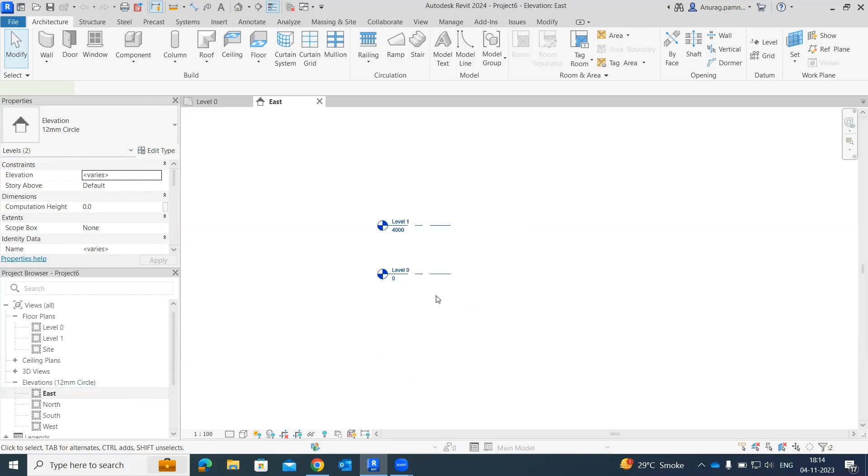And if you move on to our elevation portion, on east, you can see as well there are two different elevation levels. So there are different ways of working with levels. Let's say on the project browser I have a project of 5 floors or 4 floors, so how can we duplicate those levels and maintain and manage them in our project browser?

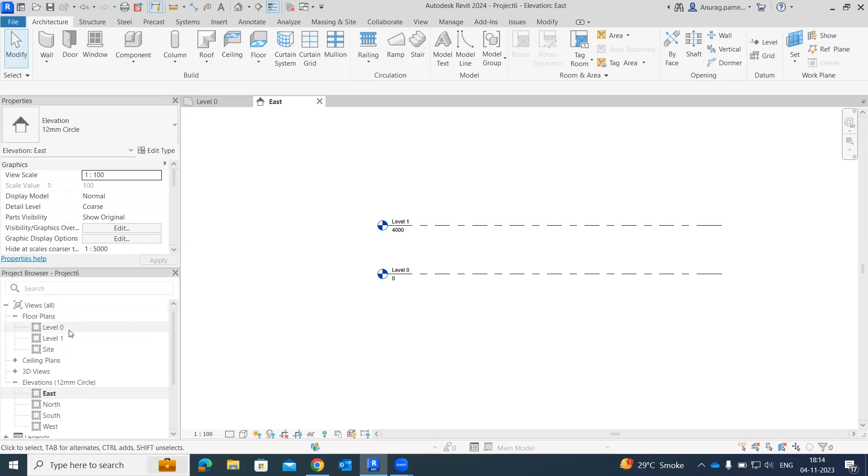So the first part is going to the level, clicking on it, and we can duplicate the view with detailing. You can see a separate copy layer is made and you can rename it. Say I would name this level number 2. So in this way you can work.

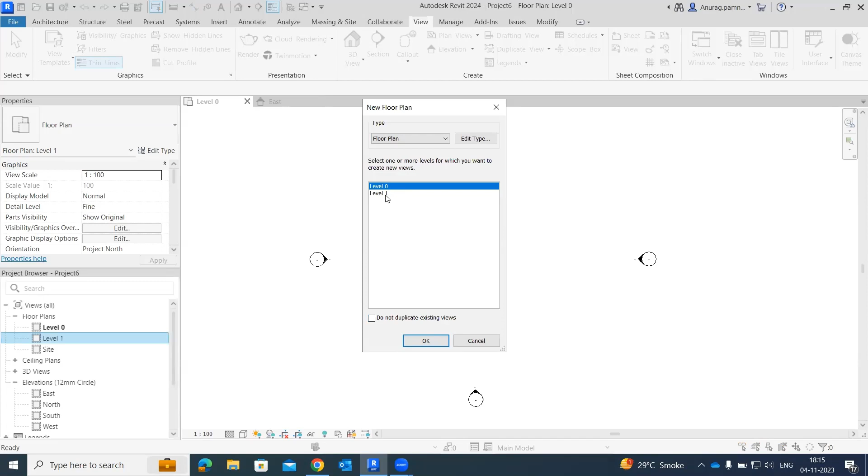One more way of working with it is I would go on it and delete it for an instance. If I need multiple copies of these two levels, I will go to my view, and under the view tab you can see plan views and floor plans. There is an option 'do not duplicate the existing views', but I need a duplication of views, so I'll uncheck it, select the particular levels, and say OK. You can see multiple levels have been created.

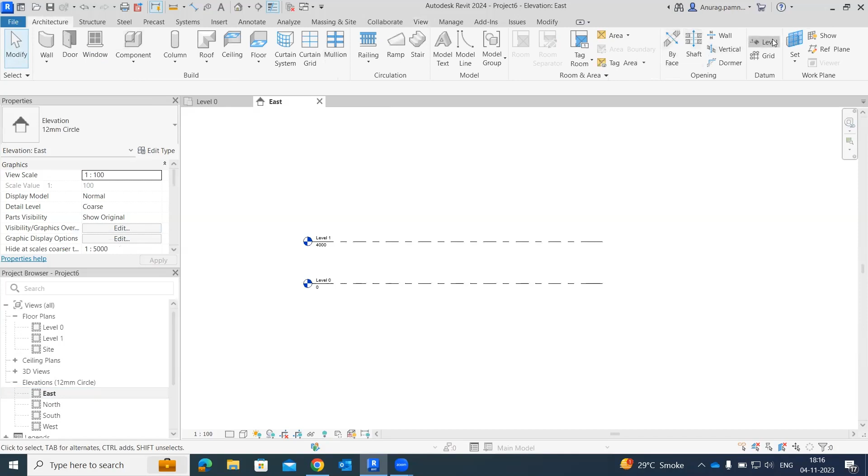Before this, a better way to have levels is I would be deleting this again, delete the copied levels. You can see on the elevation portion I have east and this. I will go to architecture, and under levels, if you start making it, it will take level 2, level 3, level 4, level 5, and so on. You can see a number of levels have already been managed in the project browser as well.

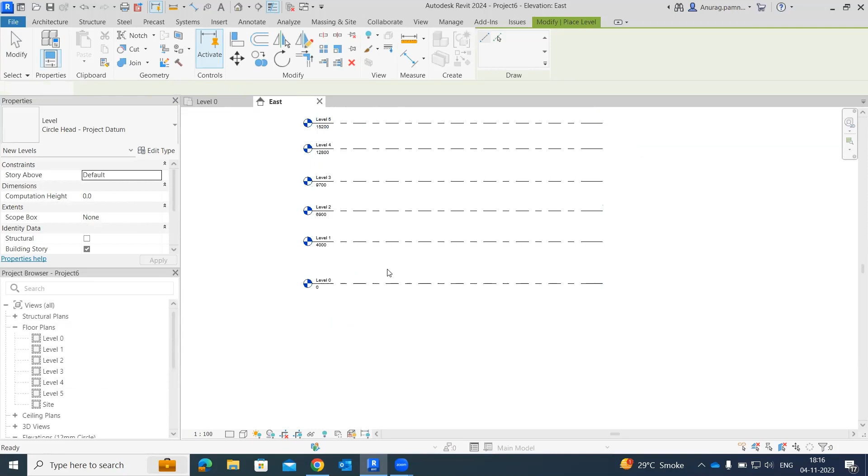So if you manage both of these together, that would be a better approach to work with levels. Just before setting up any project, set its levels and what's going to be its height, and develop the levels accordingly. It would be automatically managed on your project browser at the same time.

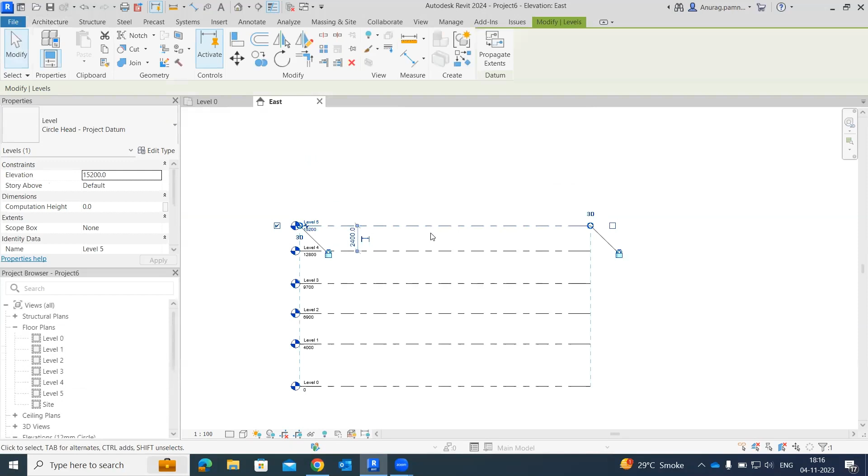Suppose I just copied it, and at the same time I have assigned it. Over here you can see there is level 6, but it doesn't appear on the project floor plans. So what I'm going to do is take it over here.

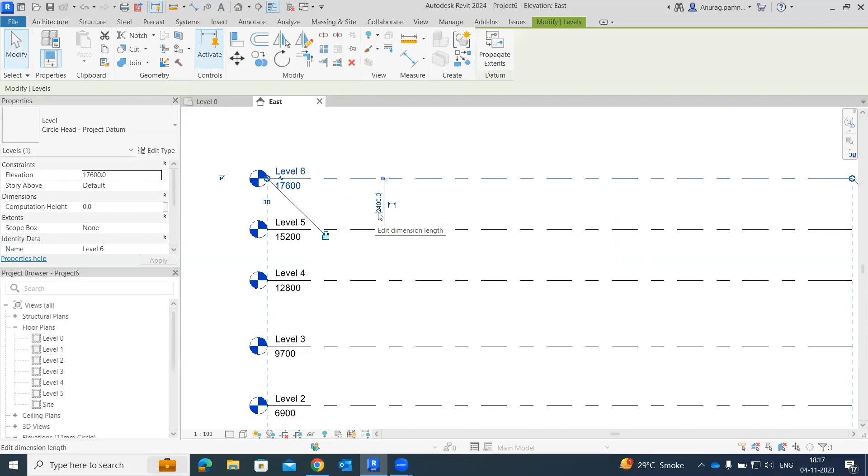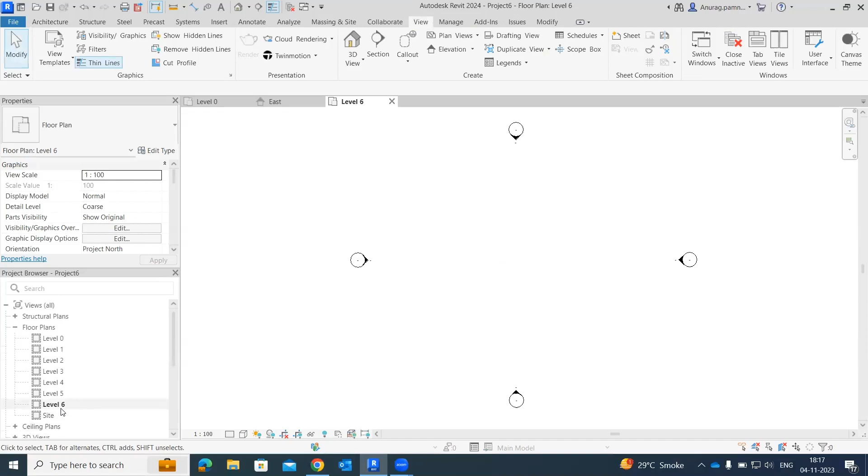If you are copying the same levels with different dimensions, suppose this height would be 3000, so I can set it accordingly. I have to go back to my view, plan views. Under floor plans, you now have this level as 6. Again you can uncheck it and you need to add the 6th level to it, say OK, select it, and OK. Now you can see a 6th floor is also available to us. This is how we work basically.

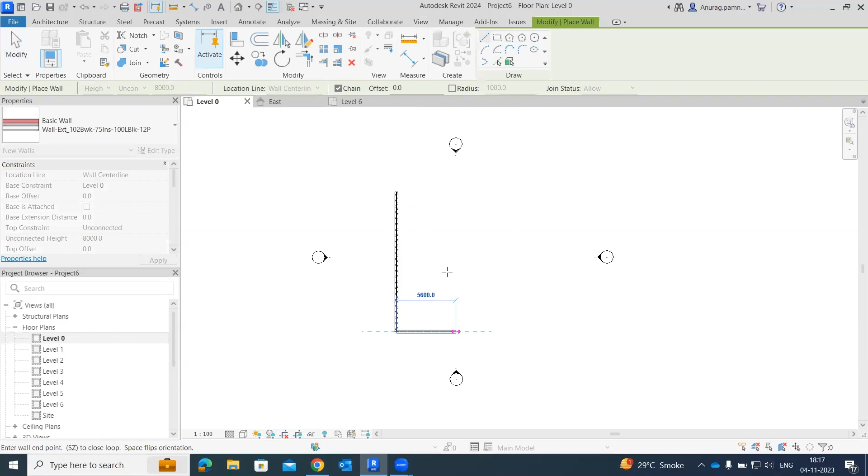Now I would have a single plan over here, and let's see how we can associate it with a particular level. I will use a command known as wall, and randomly I'm drawing a floor plan, which is at level 0.

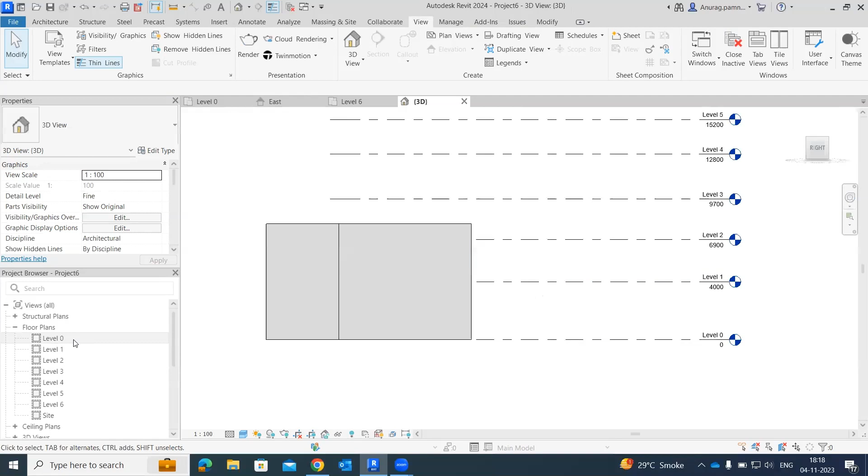So you can see on the 3D part of it, it has been associated with certain different levels. If I just have this, you can see it has a bigger height, which I don't want. I need to associate the base of it as level 0 and the top level of it as level 1. So I would be selecting the entire elements, and under properties you can see its base constraint is level 0 and its top constraint is unconnected, with an unconnected height of 8000.

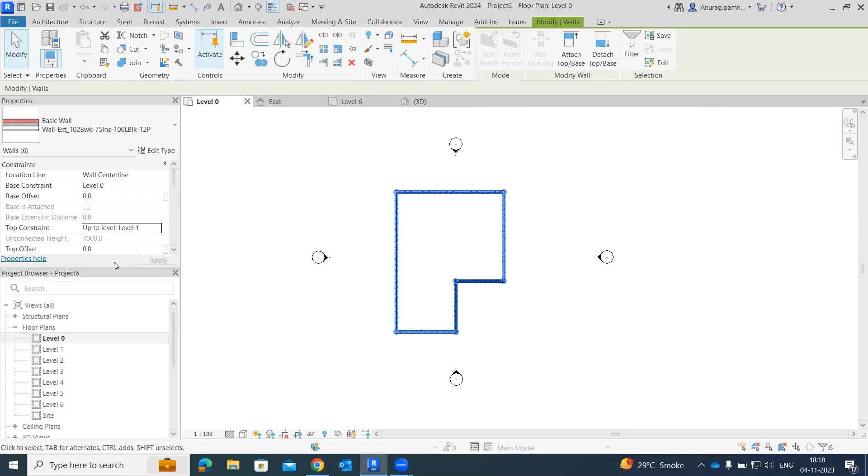So what I'm going to do is use a drop down menu, and I need to associate these 6 walls, which act as an element, to level 1, and say apply. Now you can see its unconnected height is automatically managed as 4000, which is already managed in our elevations. Our first height was 4000, so it has taken the top constraint of the element to be 4000. In this way we should work, which makes our work easier and helps us manage things in the most desired and appropriate way.